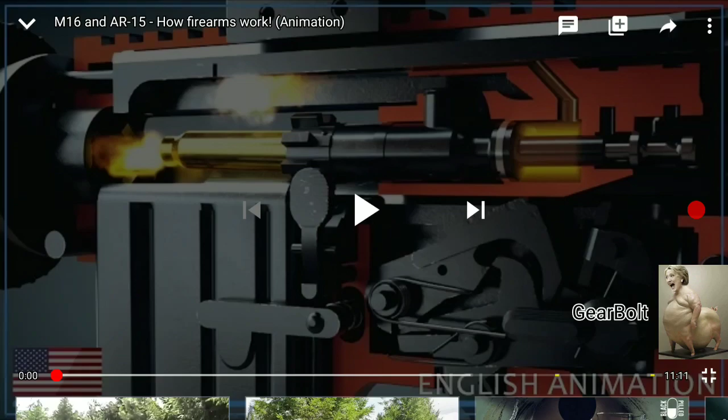This animation will explain the basic principle of AR-15 style rifles, such as the M16.

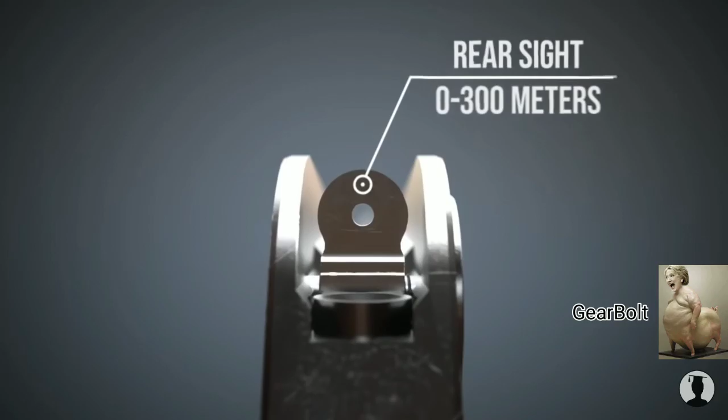The standard M16 was equipped with a carrying handle and iron sights. The rear and the front sight could be adjusted with a cartridge to zero the rifle.

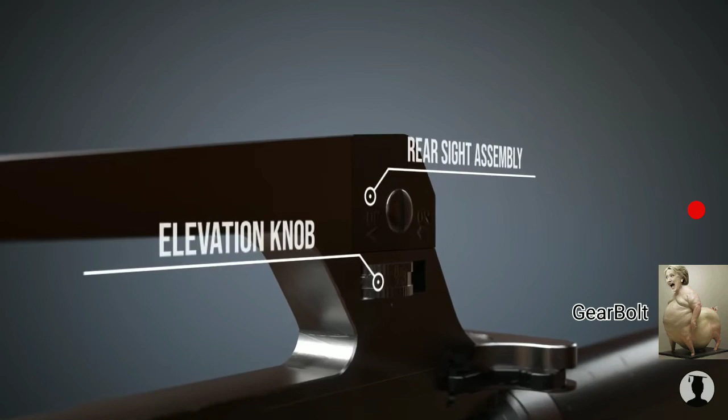A low-light level sight system for the M16 was also available. It featured a rear sight with a larger aperture of 7 millimeters and a front sight with radioactive tritium for visible light at night. Newer versions have been equipped with a low light level system and an elevation knob for better targeting.

Today, a lot of accessories are available for AR-15 style rifles. Fluted barrels save weight and dissipate heat easily.

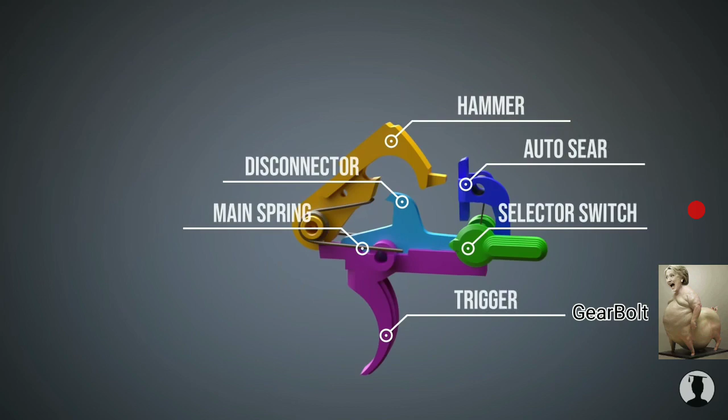Let's have a look at the M16's trigger mechanism. Initially, the M16 assault rifle could fire in semi-automatic and fully automatic mode.

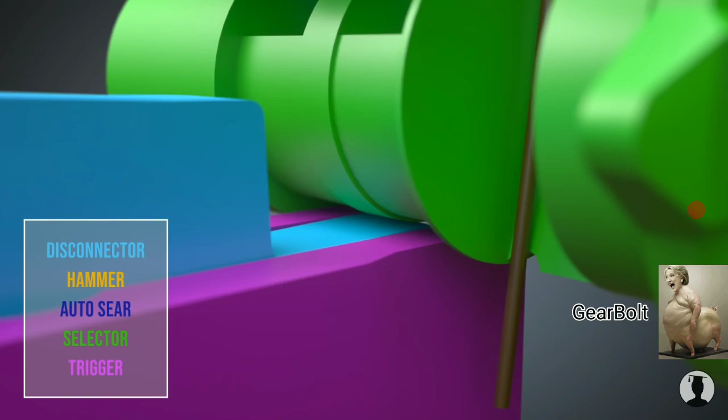When in safe mode, the trigger cannot be pulled because of the selector's shape. When the selector is moved to semi-automatic mode, the recess in the bottom of the selector allows the trigger to move when it is pulled.

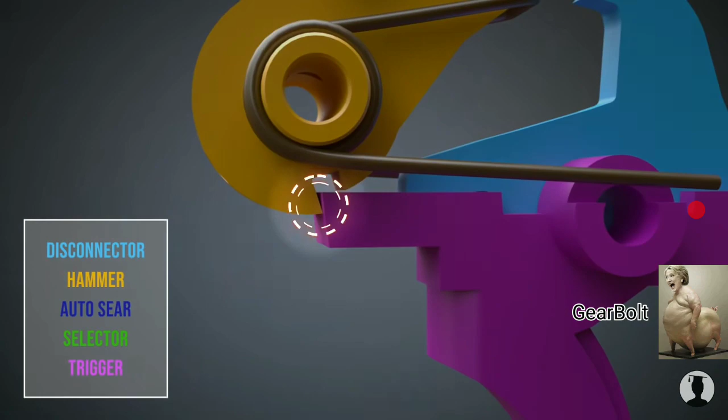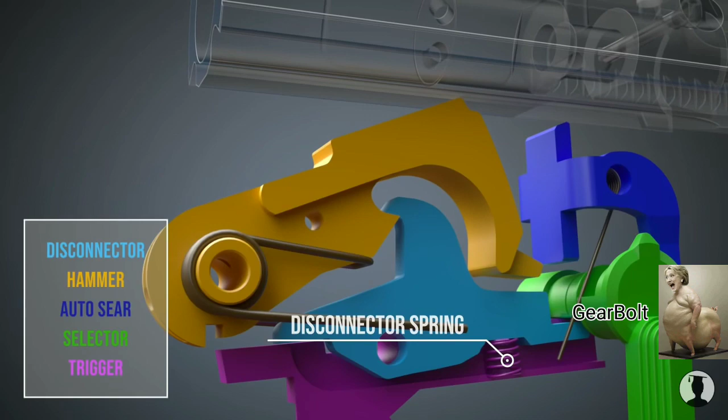As soon as the trigger is pulled, it releases the hammer. When the bolt carrier pushes down the hammer, the disconnector locks it in place. Before another shot can be fired, the trigger must be released so that the trigger sear engages the hammer again.

In fully automatic mode, the trigger can move freely, whereas the disconnector stays at its position. The selector has a recess for the auto sear. The auto sear catches the hammer when the bolt carrier moves backwards.

When the bolt carrier moves forward to chamber a new cartridge, the bolt carrier pushes the auto sear forward, releasing the hammer.

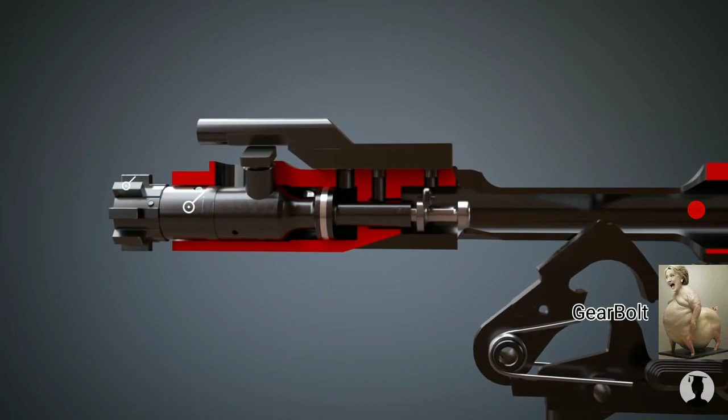Now, let's have a look at the bolt carrier. The bolt carrier houses the bolt that has several locking lugs, which are also called bolt lugs, and a cam pin. When the hammer strikes, the firing pin is pushed forward.

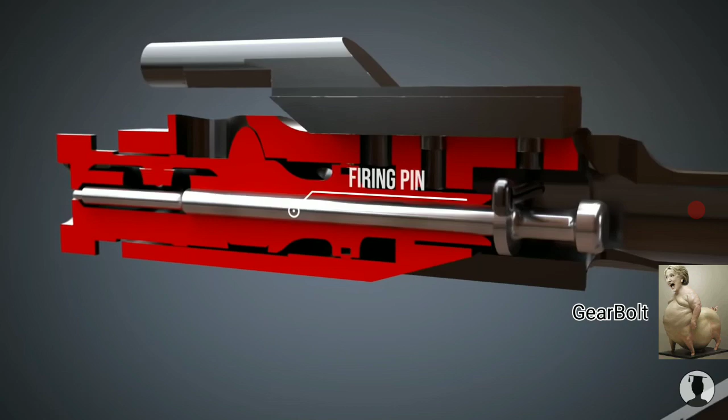The firing pin hits the bottom of the cartridge, which consists of the case, the propellant, the bullet, and the primer.

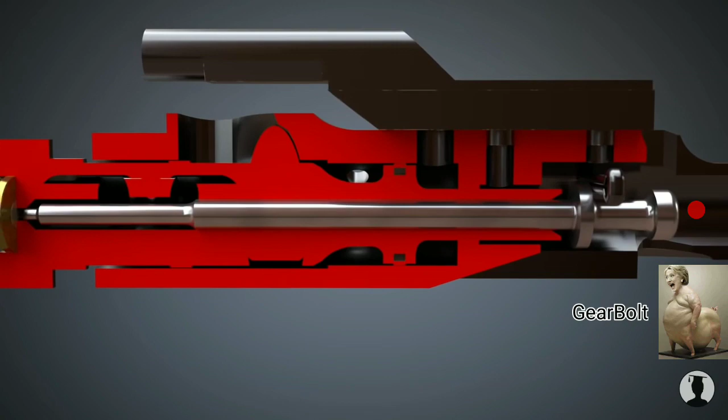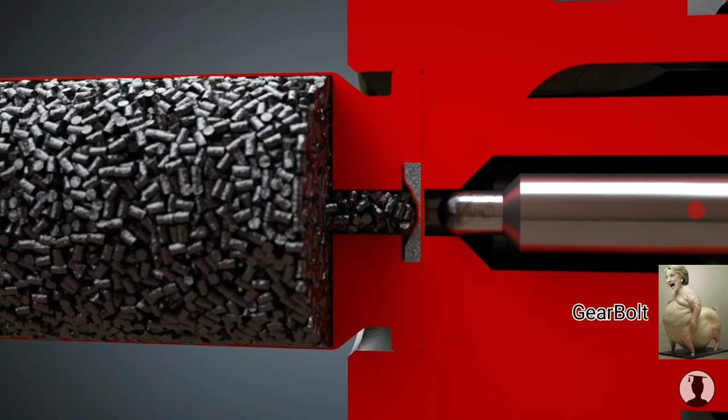The case of the cartridge is filled with the propellant. At the bottom of the case is the primer. The primer holds the priming mixture. When the rifle's firing pin strikes the primer cap, the priming mixture explodes, resulting in the ignition of the propellant.

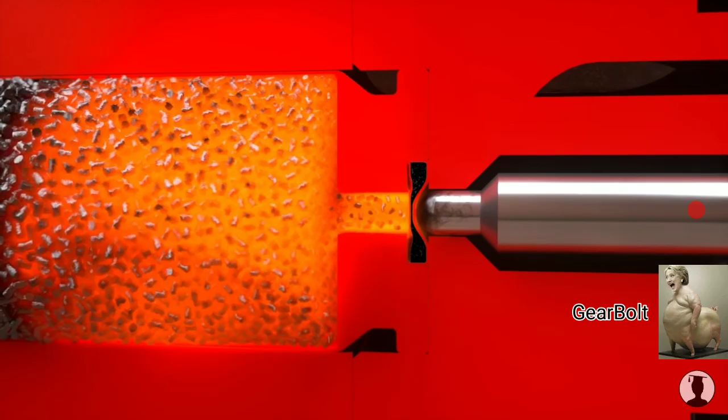The propellant is available in different shapes and mixtures. It is usually smokeless powder that reaches temperatures above 2,000 degrees Celsius. The pressure in the case pushes the bullet out of the case through the barrel to the target with a velocity of around 1 kilometer per second.

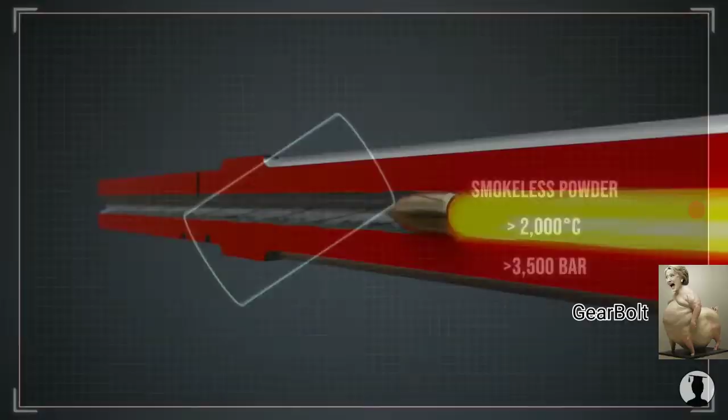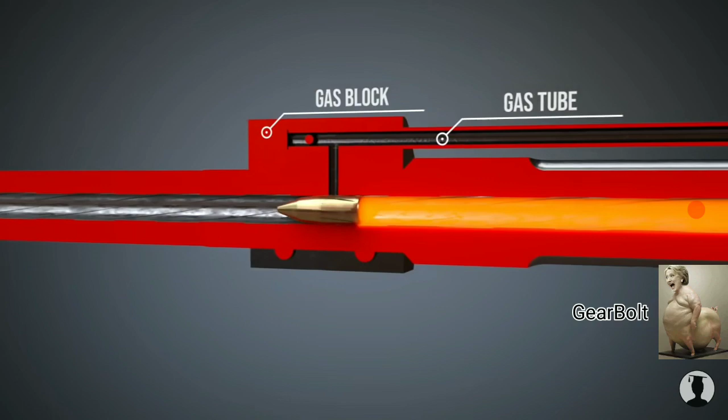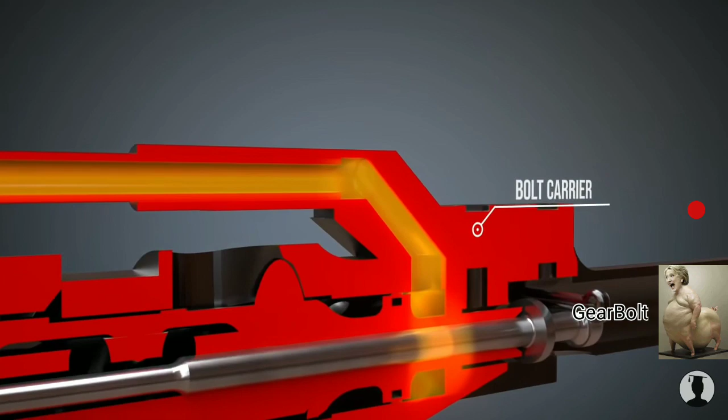The gas block and the gas tube connect the barrel with the bolt carrier. Pressure provided by the propellant is transmitted to the bolt carrier. Consequently, it is pushed back.

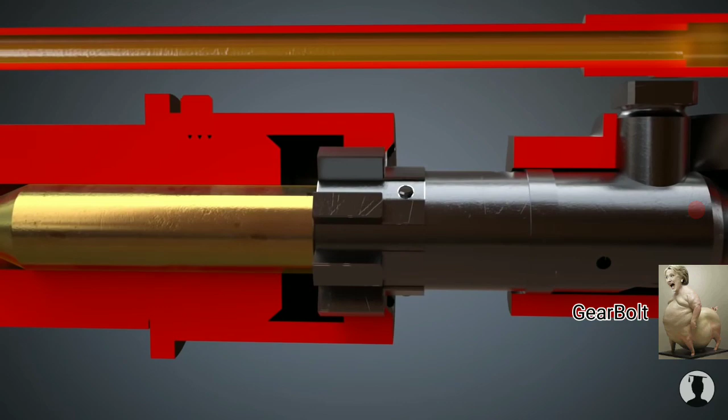The bolt is unlocked and moved backwards by the bolt carrier by means of the cam pin. The extractor removes the spent case from the chamber, while the spring-loaded ejector ejects it.

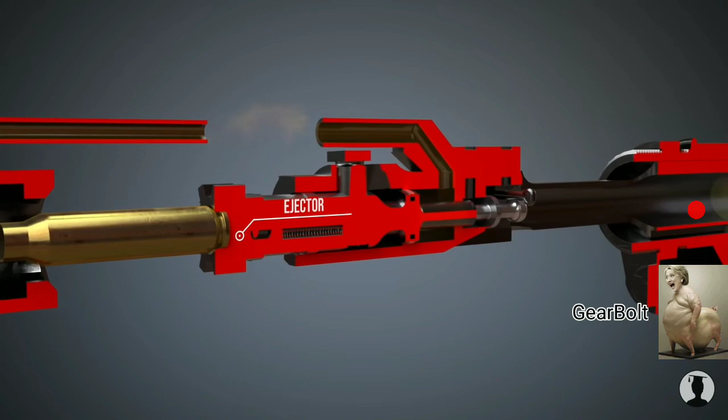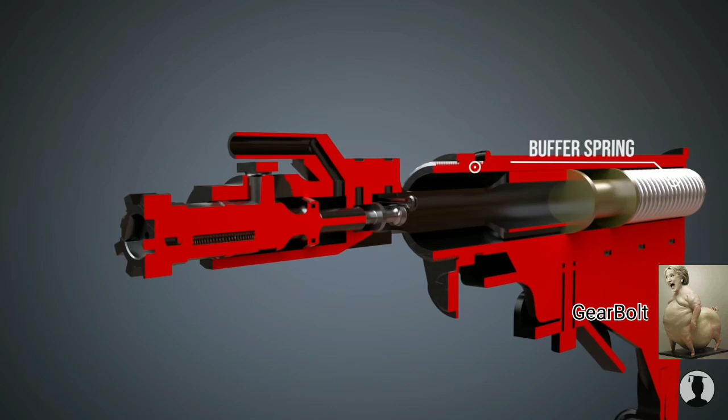The spring is compressed and ready to release the stored energy. Consequently, it will push the bolt carrier back to its initial position.

The bolt chambers a new cartridge. When the cartridge is fully seated in the chamber, the bolt is locked through rotation.

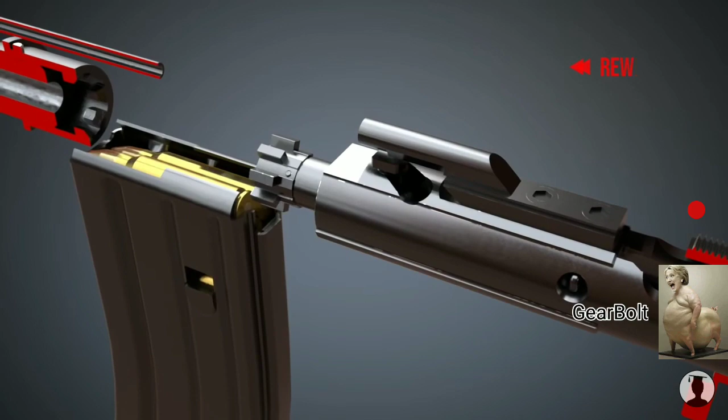Let's see it again from another perspective. The bolt pushes the cartridge into the chamber. When the bolt cannot move any further, the bolt carrier rotates the bolt through the cam pin. That way, the firearm can withstand the high pressure created by the propellant when the gun is fired.

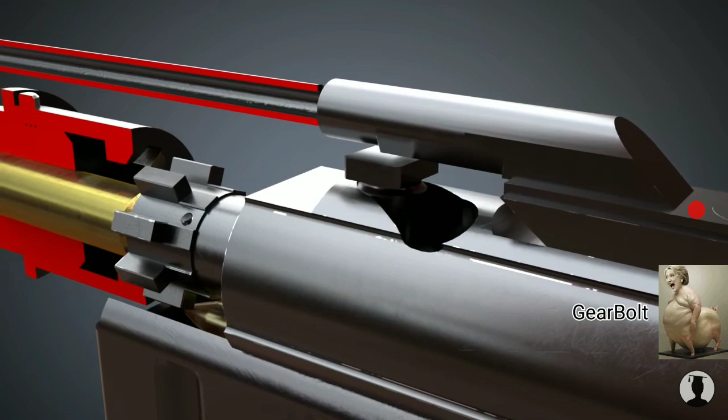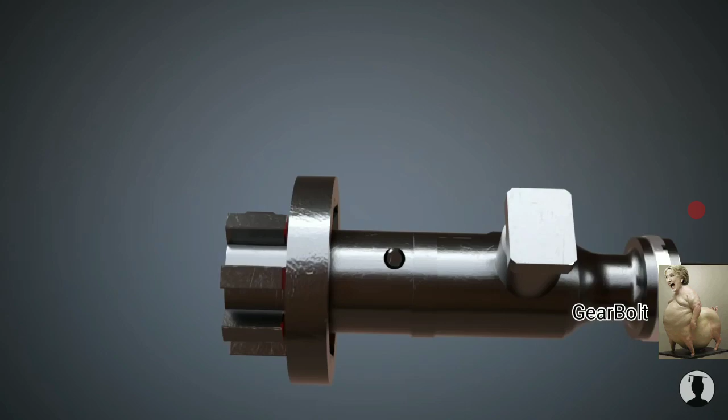Let's see again the locking mechanism. In fully automatic mode, the rifle would release the hammer and fire.

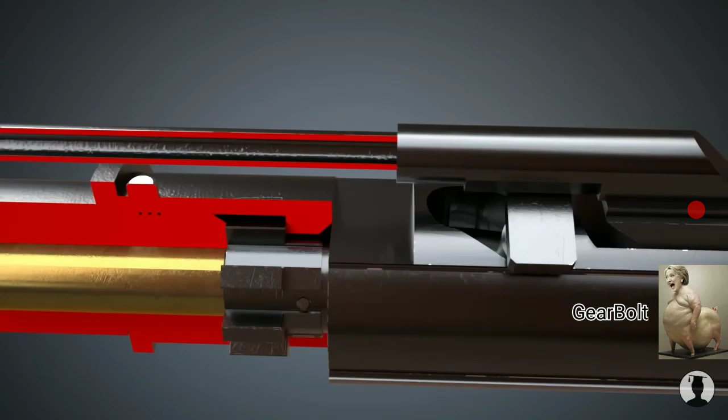Because many soldiers would fire in fully automatic mode and waste ammunition, the burst mode was introduced. When the trigger is pulled, only 3 rounds are fired.

This is possible through a spring clutch. The diameter of the spring clutch gets smaller or larger according to the direction of the force.

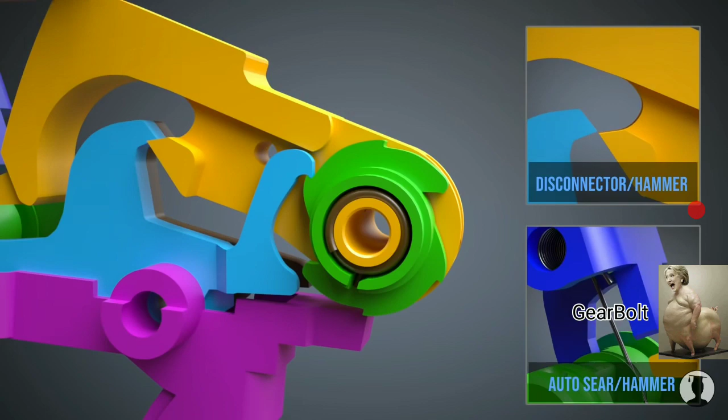So, when the trigger is pulled, the hammer strikes the firing pin. When the hammer is pushed back by the bolt carrier, the burst cam rotates thanks to the spring clutch. This is done 3 times until the burst cam follower reaches the stop notch.

Because the stop notch is deeper, the disconnector holds back the hammer. So, the trigger must be released to fire again. Let's see it again from the side view.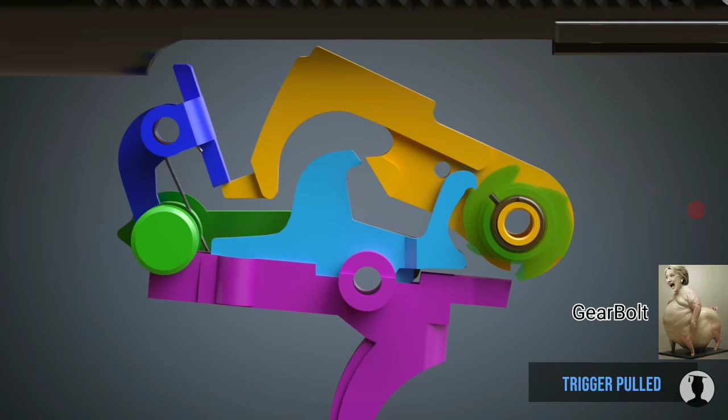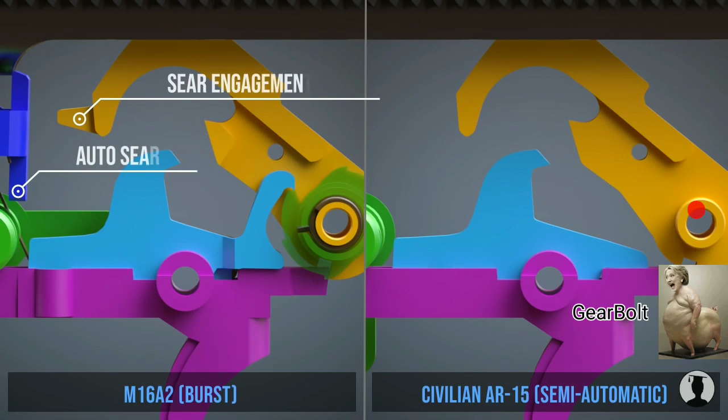The civilian AR-15 can only fire in semi-automatic mode. It does not have parts and recesses needed for fully automatic firing. Furthermore, the lower receiver does not have room for the auto-sear, and only a full auto bolt carrier can trip the auto-sear.

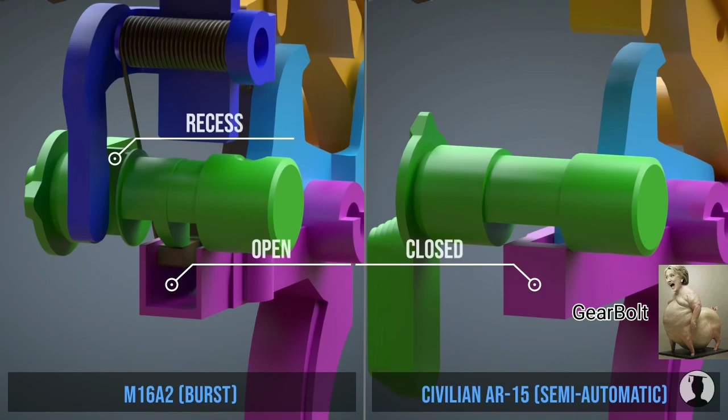The M16 and other AR-15 style rifles usually use direct impingement to cycle the action. So, when the bolt carrier moves backwards, residue can enter the upper receiver and other parts.

This gunshot residue can become a big problem when the rifle is not cleaned regularly. Let's have a look at the upper receiver.

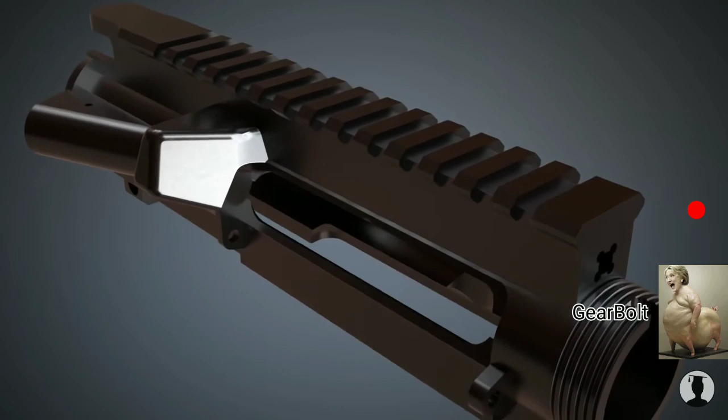When the rifle is not cleaned regularly, deposits can be found on the walls of the firearm's upper receiver over time. This can lead to increased friction between the upper receiver and the bolt carrier, so that the bolt carrier gets stuck and a new cartridge cannot be chambered.

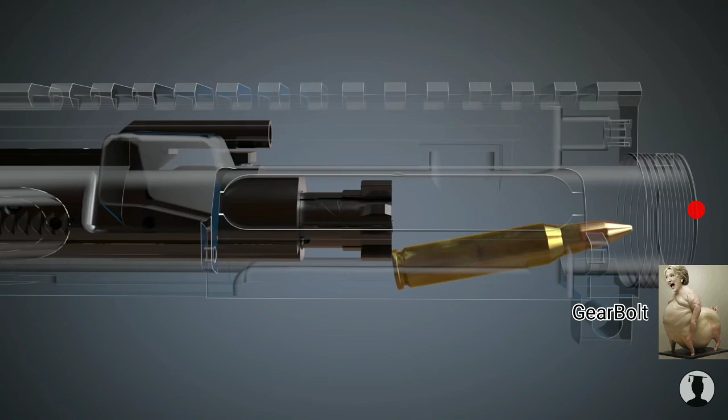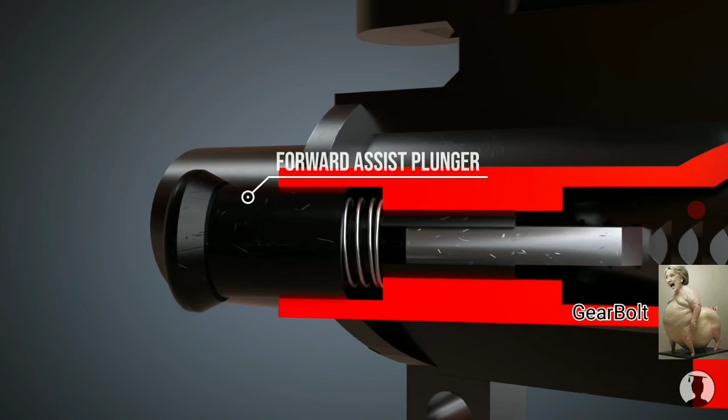Here, the forward assist can help. Pushing the forward assist plunger will move the bolt carrier forward thanks to the notches. This can be done until the bolt is locked and the rifle is ready to fire.

Flash hiders are common on military rifles. Flash suppressors hide the flash so that the soldier is not blinded in low-light shooting conditions. They do this by dispersing the burning gases so that they cool much faster.

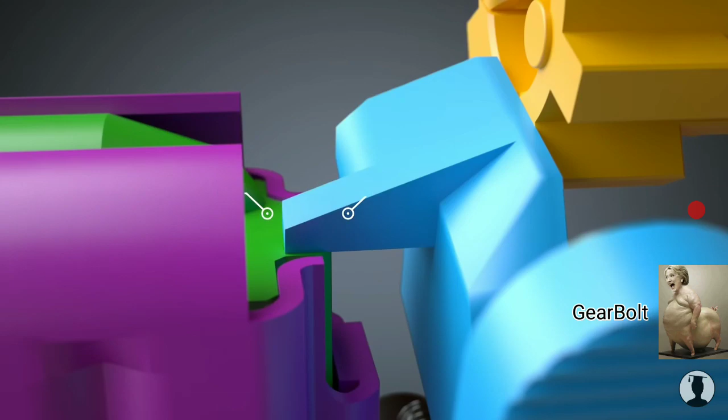When the magazine is empty, the spring-loaded magazine follower, which pushes the cartridges to the top of the magazine, pushes up the bolt catch. By this, the bolt catch locks the bolt. The operator can change the magazine by pressing the magazine catch.

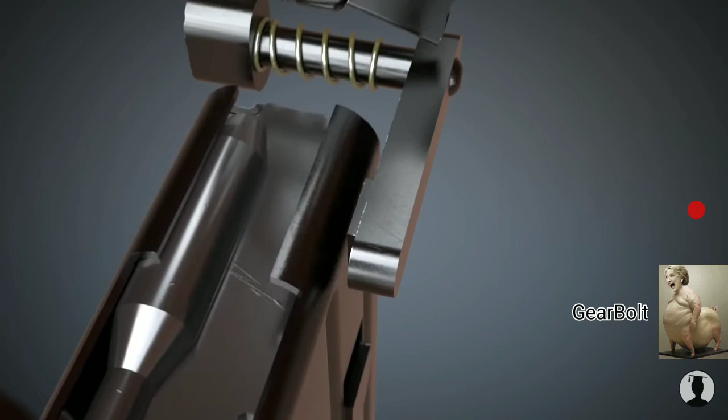Pushing the bolt catch will release the bolt. The firearm is ready to fire.

Manually charging the gun is also possible. The charging handle allows the operator to move the bolt carrier to the rear. Releasing it will chamber a new cartridge.

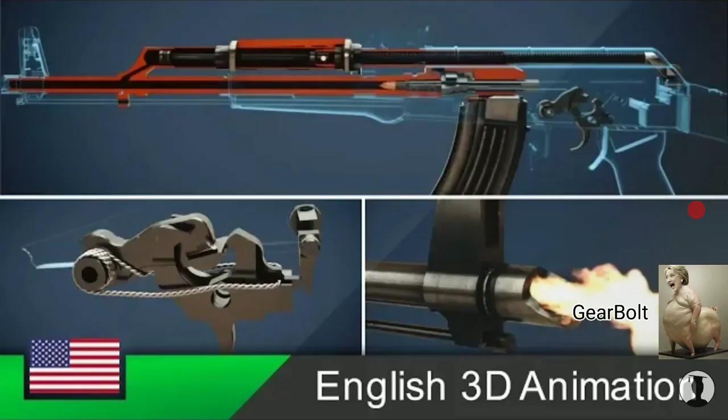The AK-47 was invented by the Russian weapon designer Kalashnikov in the 1940s. It is the most iconic and widely used assault rifle in the world.

The shooter aims with the help of rear and front sight. The sight leaf, which represents the rear sight, is available in 800 and 1,000 meter versions. The maximum effective range is between 300 and 400 meters.

The standard magazine has 30 rounds and is curved. The magazine can be removed via the magazine catch.

Originally, the AK-47 used M43 cartridges equipped with Berdan primers. Detailed information on cartridges can be found in the corresponding animation in this channel.

The safety lever is used to make the firearm safe. Loading the weapon is not possible in this position. The safety lever allows the shooter to choose between semi-automatic and fully automatic firing mode.

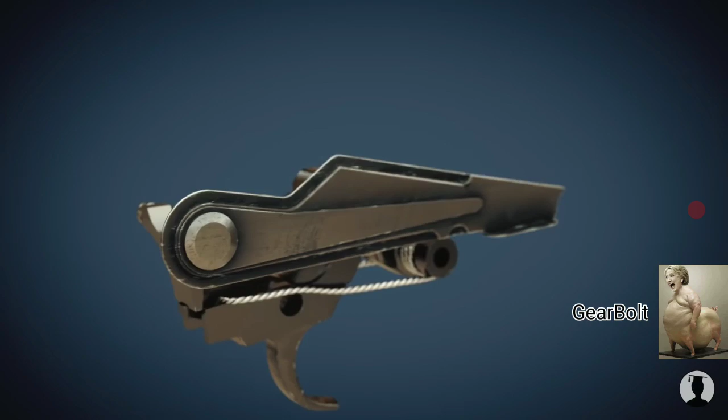In the middle position, the safety lever locks the disconnector. In the uppermost position, trigger and disconnector are blocked. In the lowest position, trigger and disconnector can move freely.

As soon as the trigger is pressed, the hammer is released. The disconnector catches the hammer after firing. The trigger must be released before another shot can be fired. The hammer is then immediately caught by the trigger, and the gun is ready to fire again.

In fully automatic firing mode, the hammer can move freely until the trigger is released.

AK-47 and AKM are assault rifles with a rotating bolt locking mechanism. Here, the bolt rotates to lock and unlock via two locking lugs.

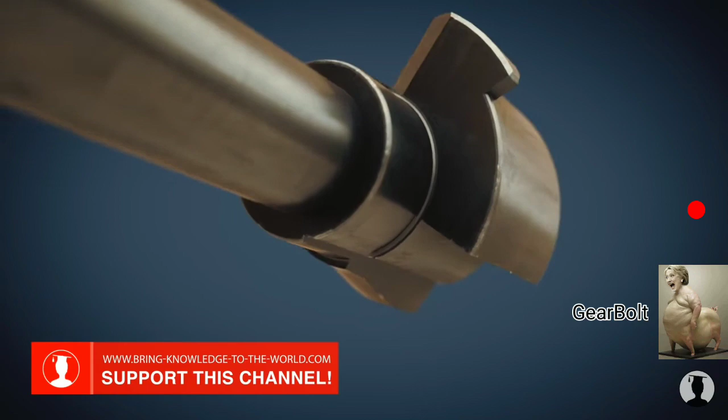The firing pin can slide back and forth within the bolt. The retaining pin prevents the firing pin from sliding too far backwards.

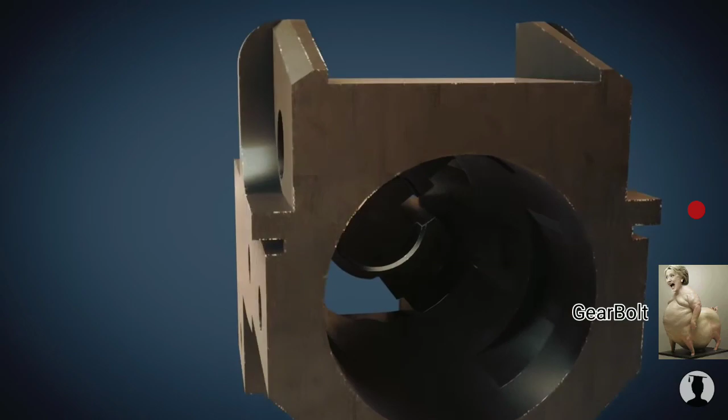The front trunnion connects the barrel and the receiver. It has recesses for the bolt's locking lugs. The contact points are marked in red.

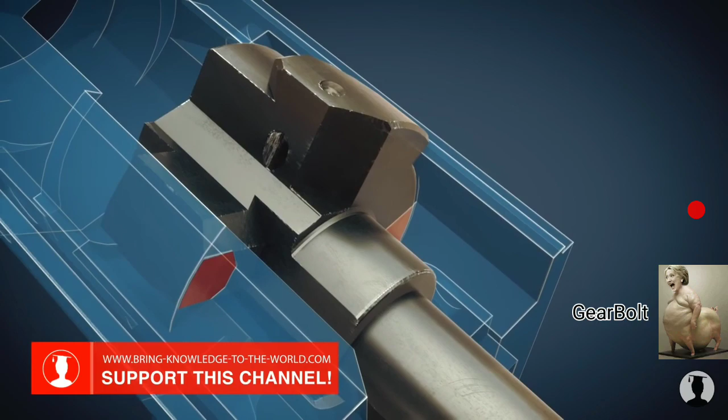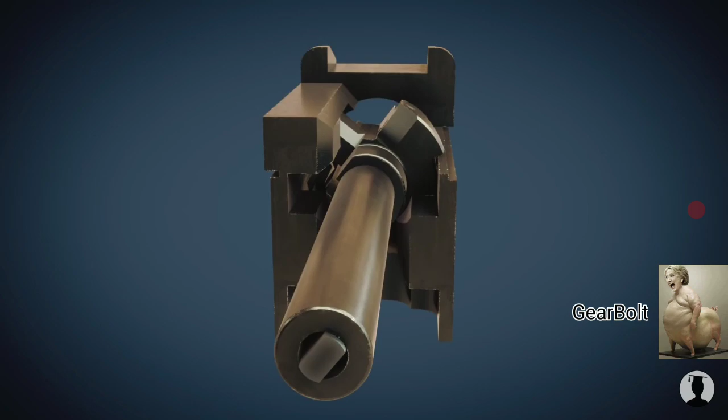When the bolt rotates, it is unlocked so that it can slide back and forth. The bolt is rotated through the cam guide machined into the underside of the bolt carrier, marked red here. As soon as the bolt carrier moves, the bolt rotates.

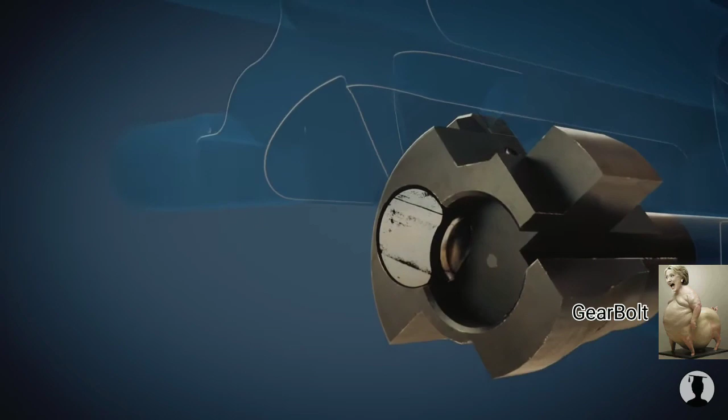Let's take a look at what happens when the trigger is pressed. The hammer is released, which drives the firing pin against the primer of the cartridge. The propellant is ignited,

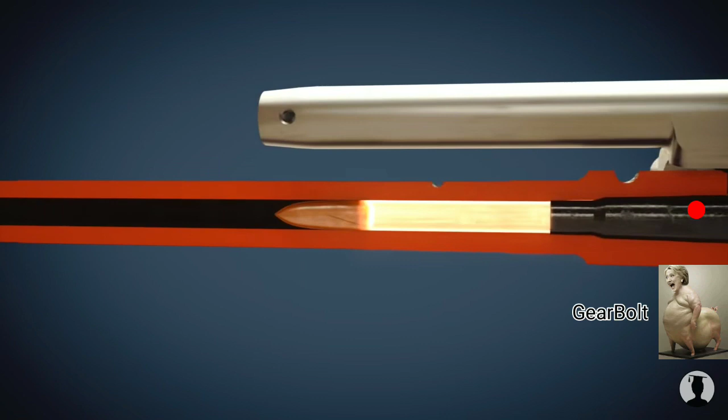accelerating the bullet. The gas piston is pushed back by gas pressure. That is why this type of reloading is called gas-operated reloading.

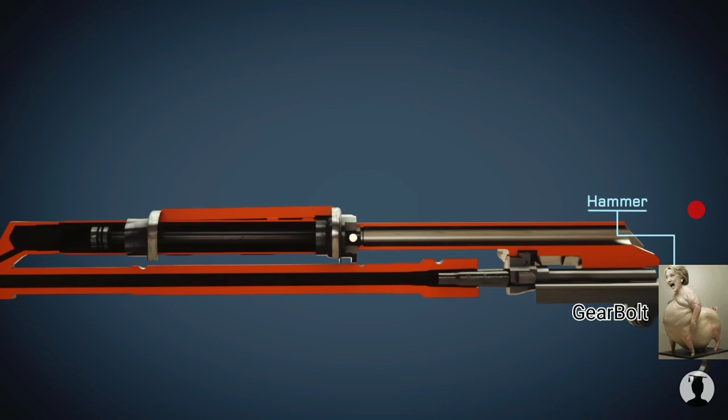Let's have another look at it. The gas piston is connected to the bolt carrier, so the bolt carrier is pushed back, unlocking the bolt and moving it backwards. With the help of the extractor, the bolt locks the case and ejects it through the ejector.

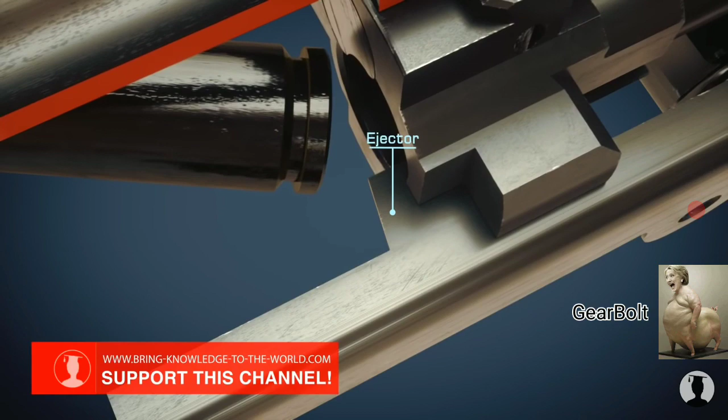The hammer has been pushed down by the bolt carrier and is then caught by the disconnector. The tensioned recoil spring pushes the bolt carrier forward. This causes the bolt to feed a new cartridge into the chamber.

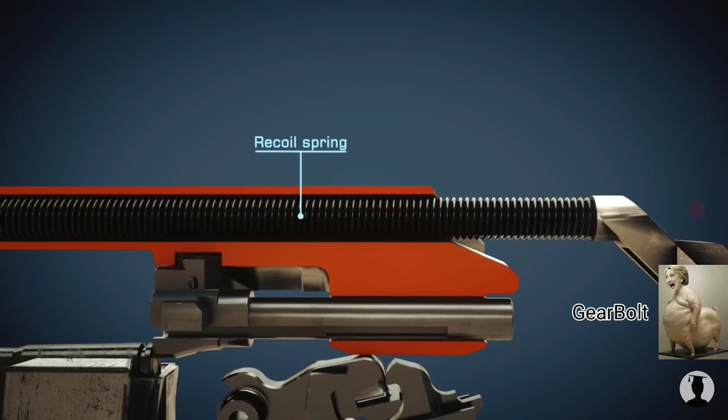Finally, the bolt is locked. As soon as the trigger is released, the rifle is ready to fire again.

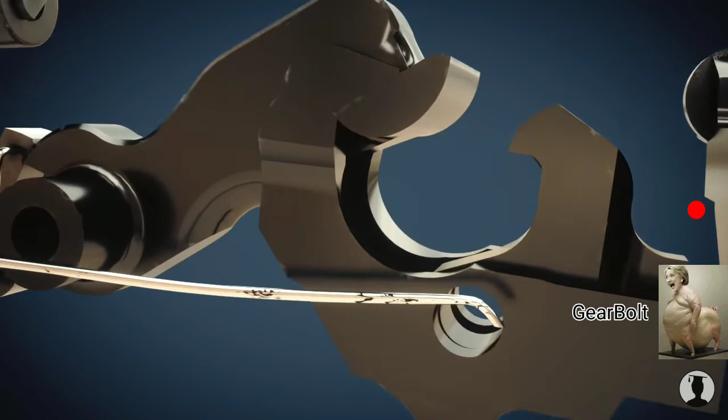In fully automatic mode, the auto sear comes into play. The auto sear makes sure that the breech is locked before the hammer depresses the firing pin. The auto sear is tripped by the bolt carrier.

The AKM was equipped with a muzzle brake. Gas pressure coming from the barrel pushes the weapon down to the left, preventing unwanted rising of the barrel.

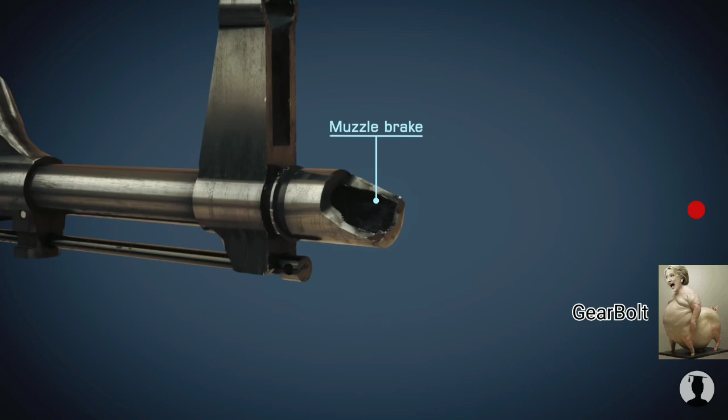Ooh, I like this one.